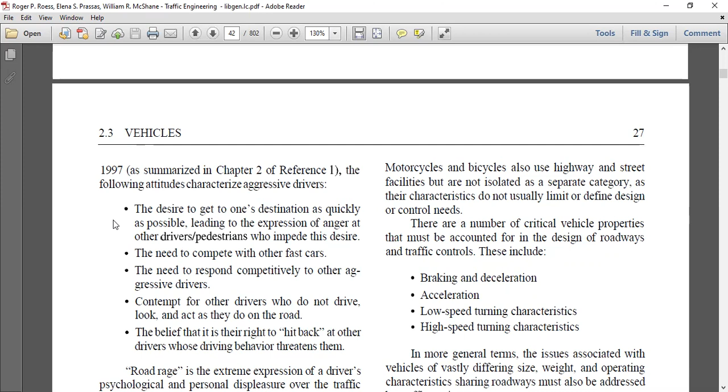Road rage is the extreme expression of a driver's psychological and personal displeasure over the traffic situation he or she has encountered. It does, however, remind the traffic engineers that drivers display a wide range of behavior in accordance with their own personalities and psychological characteristics. Once again, most of these factors cannot be addressed directly through the design or control decision and are best treated through vigorous enforcement and educational programs.

The motorcycle and bicycle also use highway and street facilities, but are not isolated as a separate category, as their characteristics do not usually limit or define design or control needs. There are a number of critical vehicle properties that must be accounted for in the design of roadways and traffic control. This includes braking and deceleration, acceleration, low speed turning characteristics, and high speed turning characteristics. So the main four controls of any vehicle are discussed in these four points, like braking and acceleration.

When a person applies a brake, what is the deceleration ratio from a particular design speed to the stopping speed, and what is the braking efficiency of that vehicle? If we have to suddenly stop the vehicle and we apply a brake, and the vehicle moves just 10 to 20% of the designated SSD distance, we call the braking efficiency of that vehicle pretty good. But if after applying the brake the vehicle is still moving with decelerating speed or covers more than the SSD distance, the braking efficiency of that vehicle is much lower.

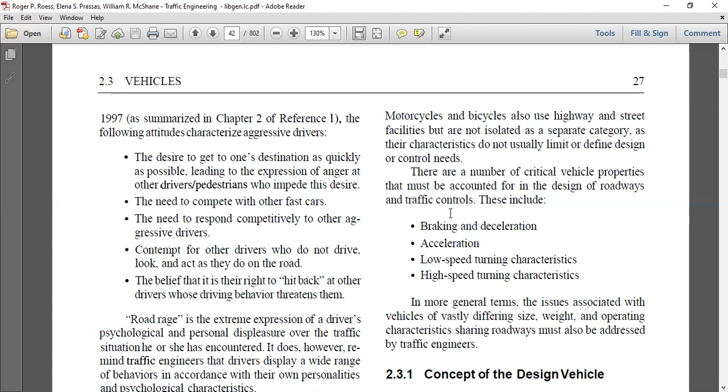In highway engineering, when we were discussing super elevation, we saw that vehicles moving at a constant speed on a curve slightly tend toward the outer edge of that curve. So the low speed and high speed turning characteristics both depend on the weight of the vehicle, the axle distance between the two tires, and the center of gravity of that vehicle. In more general terms, the issues associated with vehicles of vastly different size, weight, and operating characteristics sharing roadways must also be addressed by traffic engineers.

In highway engineering, we were discussing design vehicle and design speed. So what is a design vehicle and design speed? When any road is going to be built on a particular land, a design vehicle and design speed are implemented such that the majority of vehicles pass at that speed. Given the immense range of vehicle types using street and highway facilities, it is necessary to adopt a standard vehicle characteristic for design and control purposes. For geometric design, AASHTO has defined 20 design vehicles, each with specified characteristics.

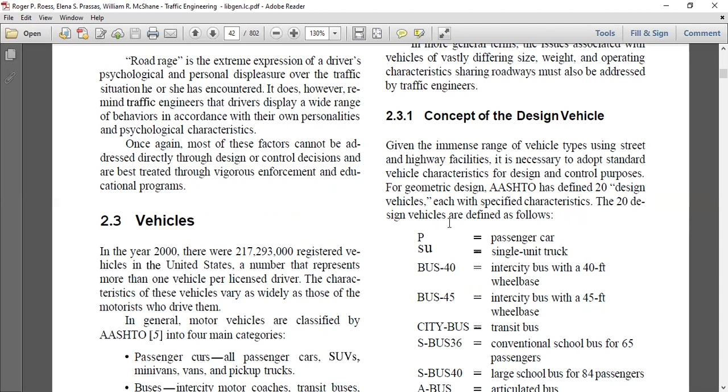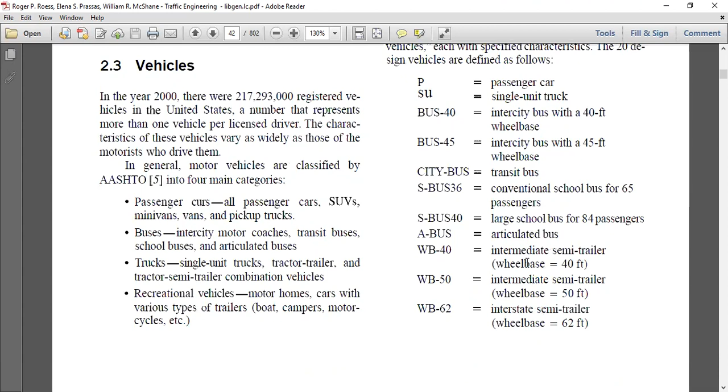Okay, so AASHTO gives us a variety of the specific vehicles which are to be taken into account while designing any transportation facility or any road networks. So wheelbase dimensions are measured from the frontmost axle to the rearmost axle, including both the tractor and the trailer in the combination vehicle. Design vehicles are primarily employed in the design of turning roadways and intersection curbs and are used to help determine appropriate lane widths and such specific design features as lane widening on the curve.

So in highway engineering, when we're discussing the superelevation and widening of the roads, for that kind of phenomena or processes, every traffic engineer has to decide a particular number of the design vehicles which are going to pass on that street network or on that highway. So with the help of the dimension of the vehicles and the basic characteristics of those vehicles, the traffic engineers adopt and change the curvatures and the lane widening or the lane dimension of that particular street or highway.

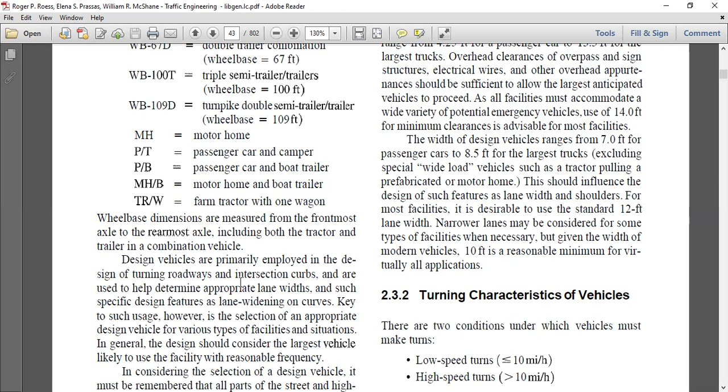Key to such uses, however, is the selection of an appropriate design vehicle for various types of facilities and situations. In general, the design should consider the largest vehicle likely to use the facility with a reasonable frequency. So when any traffic engineer or highway engineer is going to design any street network or highway road, they keep in mind the largest vehicle for all kinds of design specification or design criteria. So when the largest vehicle is moving with ease, all other types of vehicles are convenient for that kind of system.

So in considering the selection of a design vehicle, it must be remembered that all parts of the street and highway network must be accessible to emergency vehicles, including fire engines, ambulances, emergency evacuation vehicles, and emergency repair vehicles, among others. Therefore, the single unit truck is usually the minimum design vehicle selected for most local street applications.

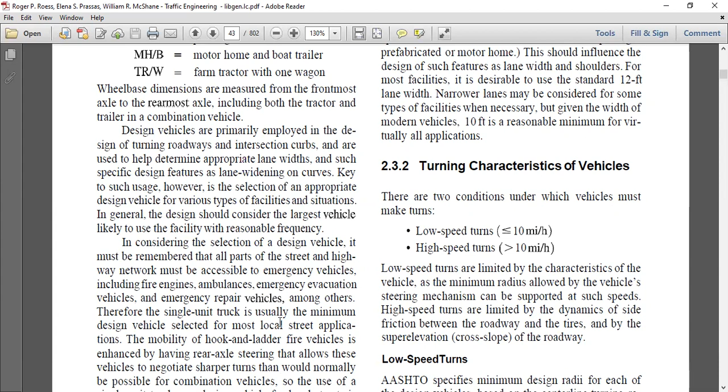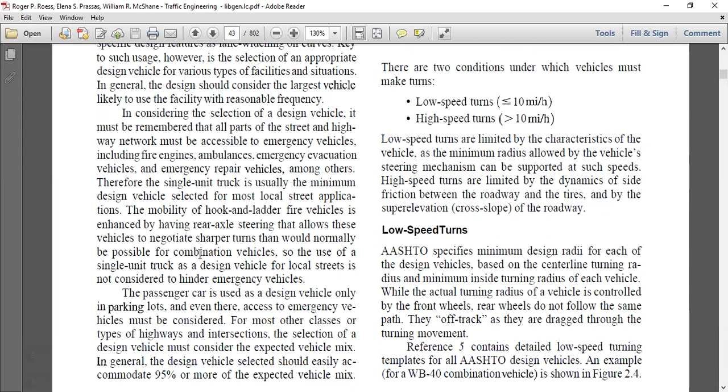The mobility of hook and ladder fire vehicles is enhanced by having a rear axle steering that allows this vehicle to negotiate sharper turns than would normally be possible for combination vehicles. So the use of the single unit truck as a design vehicle for local streets is not considered to hinder emergency vehicles. The passenger car is used as a design vehicle only in parking lots, and even then, access for emergency vehicles must be considered.

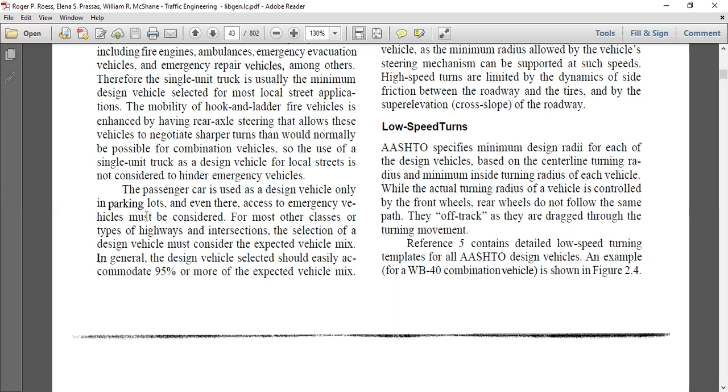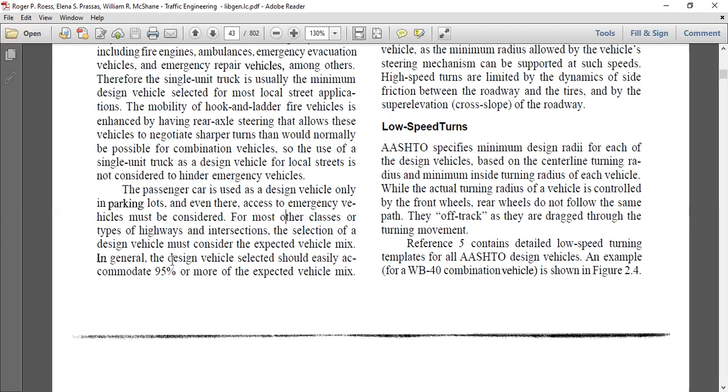For most other classes or types of highways and intersections, the selection of a design vehicle must consider the expected vehicle mix. In general, the design vehicle selected should easily accommodate 95% or more of the expected vehicle mix. The physical dimensions of the design vehicles are also important for consideration. Design vehicle heights range from 4.25 feet for a passenger car to 13.5 feet for the largest truck. Overhead clearance of overpasses and sign structures, electrical wires, and other overhead appurtenances should be sufficient to allow the largest anticipated vehicle to proceed.

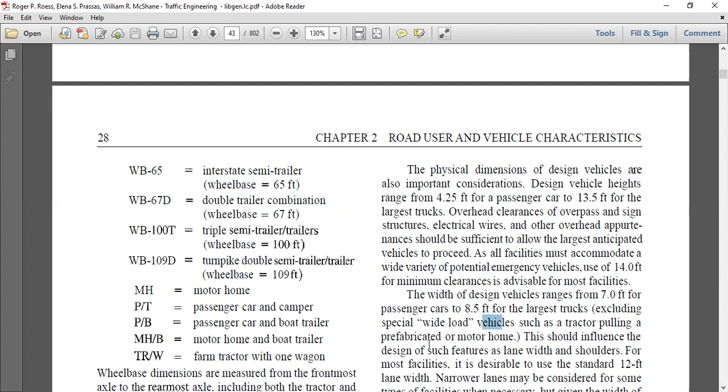As all facilities must accommodate a wide variety of potential emergency vehicles, use of 14 feet for minimum clearance is advisable for most facilities. The width of the design vehicle ranges from 7 feet for a passenger car to 8.5 feet for the largest truck, excluding special wide load vehicles such as a tractor pulling a prefabricated home or a motorhome. This should influence the design of such features as lane width and shoulders. For most facilities, it is desirable to use the standard 12 feet lane width. Narrower lanes may be considered for some types of facilities when necessary, but given the width of modern vehicles, 10 feet is a reasonable minimum for virtually all applications.

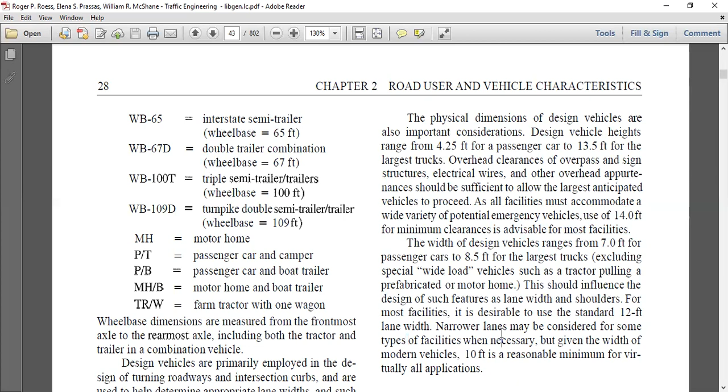Okay. So the dimensions of the vehicle are of much more importance while designing any road system or highway system. So the height and the width of any particular vehicle are useful for deciding the lane width and the shoulder dimensions on the highway as well as the street dimensions. Okay. So next is the turning characteristic of the vehicle.